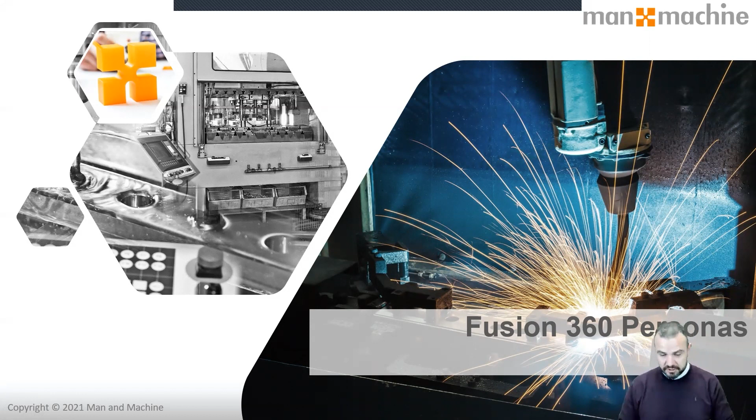This webinar, we're going to be looking at Fusion persona offerings. Many of you already use Fusion and some of the extensions, perhaps the machining extension, simulation, or manage extension. We're going to be looking at a relatively new package offering from Autodesk called the persona offerings, and explore the benefits and reasons why they might be of interest to you.

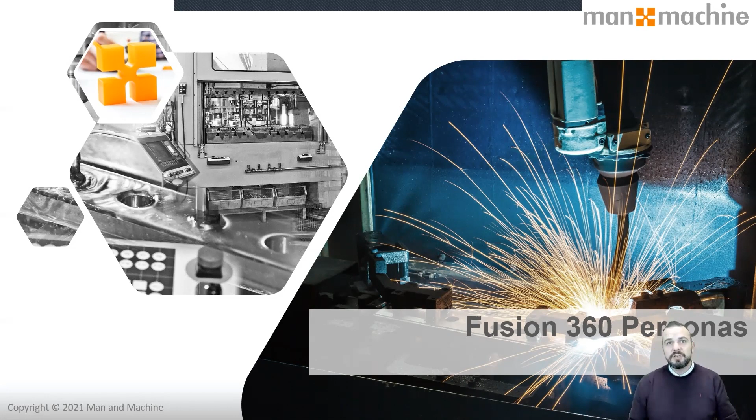For those of you that already know and maybe already use Fusion, you know that Fusion is a platform. The CAD/CAM industry for many years has become relatively confusing and relatively hard for you to justify company investments in specific tools for specific tasks.

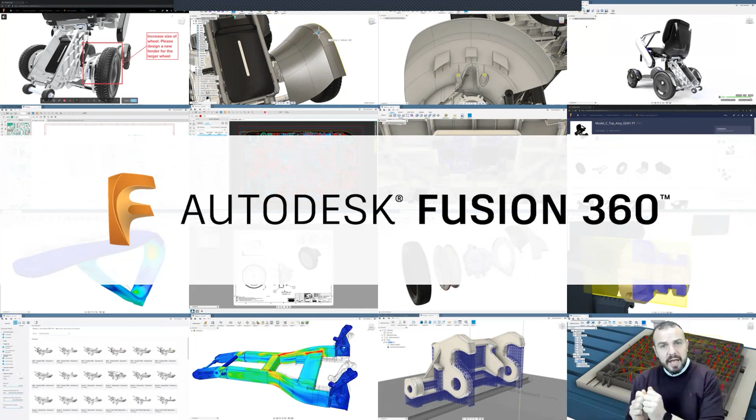Autodesk really want to challenge that into the next generation of tools. Rather than thinking about Fusion as a CAD tool, which of course it is, think of Fusion as a platform, a cloud-based hybrid working environment, giving all your users at various levels access to the right tools at the right time and the right price.

But let me start with base Fusion. For those of you that have investigated or followed the journey of Fusion for many years will know that it has become a very powerful CAD/CAM tool. And it's a little bit more than that.

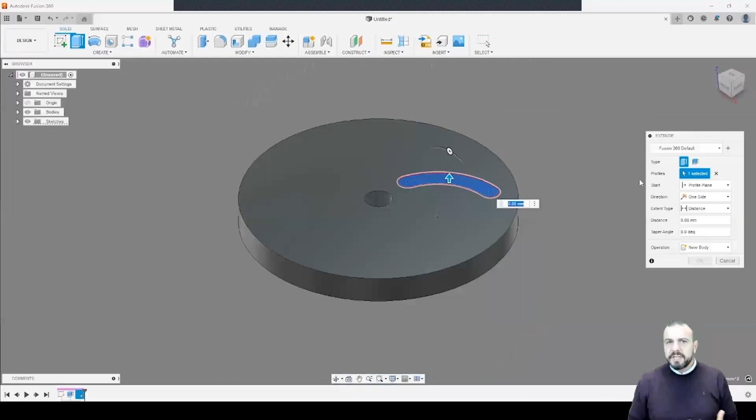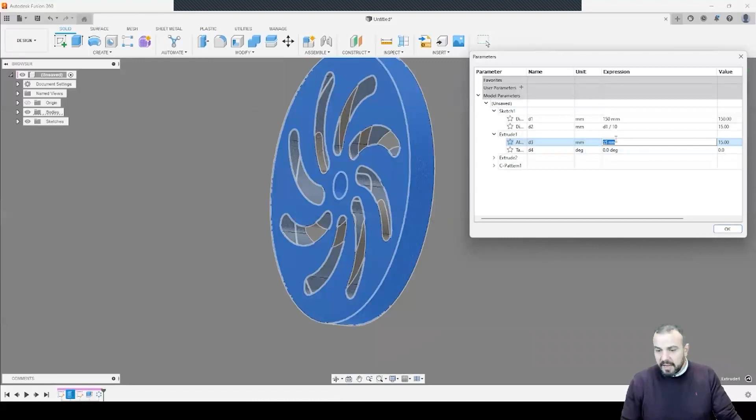Three or four years ago, if you'd have asked me about Fusion, perhaps I would have said that it's a tool really quite nice to use for hobbyists or home users. But in recent years, it's really become a tool to look at again for businesses. The functionality going into Fusion, the rapid rate of development, is more than I've ever seen within the CAD/CAM industry, and I've been in the industry for 18, 19 years now.

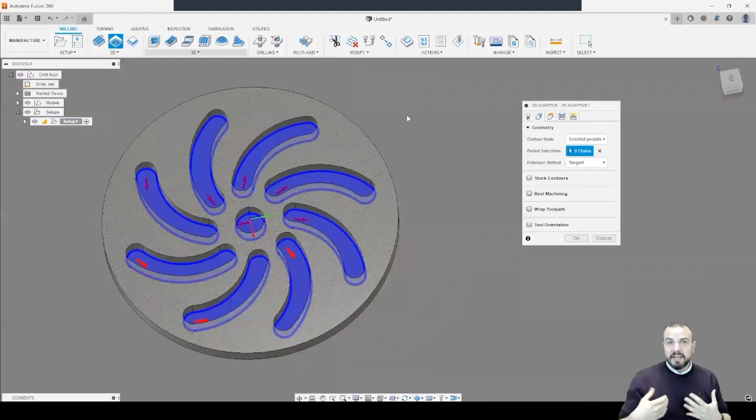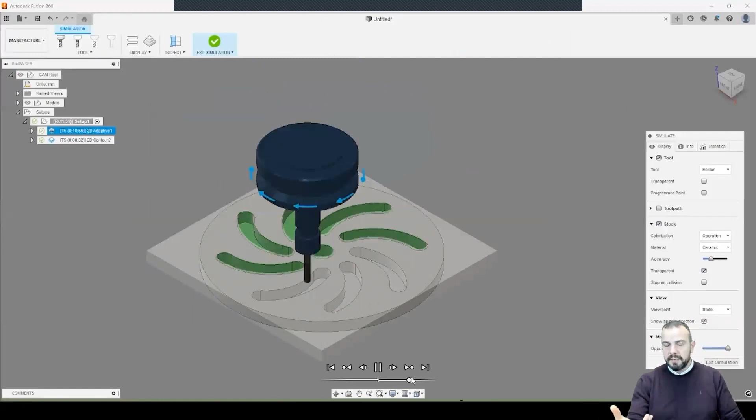But base Fusion, at a very affordable price, gives all fully functional CAD geometry tools, all the tools you would expect - patterning, cutting, machining, being able to do 2.5 and 3 axis machining straight out of the box, in the same platform, same environment, fully functional tools for an affordable subscription price. That's why, when people hear the price of Fusion - around £400 per year per user, don't quote me on that - they almost think, well, it can't be that good.

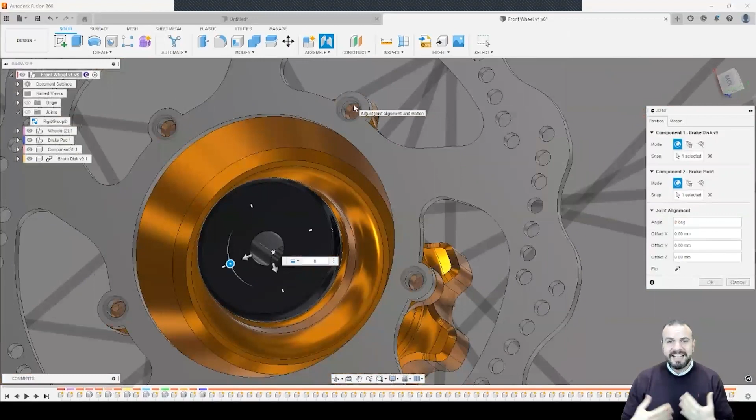It's natural to think that a cheaper product isn't as good as a more expensive product. Well, you'd be wrong. I'd encourage you to go and try Fusion, because the people we talk to about Fusion, they like using it. They enjoy using it.

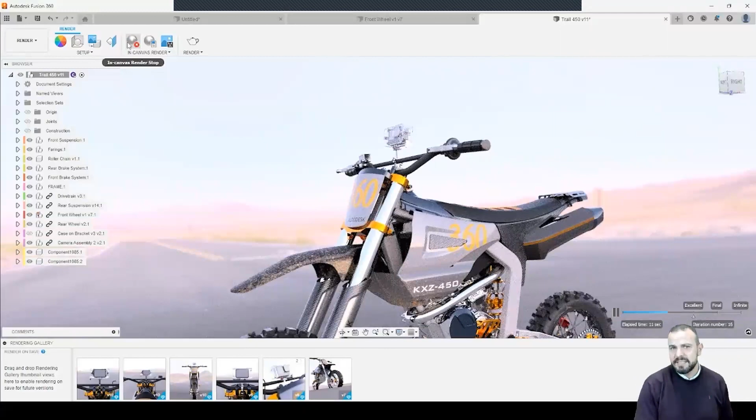It's almost putting the fun back into CAD tools. Gone are the days of menu after menu after menu, and actually having an intuitive environment that understands what you're clicking on, understands what you want. It gives you the right parameters based upon the geometry you're in, as well as the functional CAD, CAM, simulation and rendering tools.

Autodesk over the years have acquired many bits of technology, some awesome bits of software for specific tasks. But the way it's always been done from a cost perspective is that you, as a user, would need to almost justify the cost to go and buy that bit of tool to do that function. Often, if it's something you're doing once in a blue moon, it's a difficult sell to your boss, difficult to justify the cost.

Well, you don't need to anymore. It's in the box, you have Fusion. It gives you rendering, very functional rendering, and Autodesk is very strong in the rendering environment.

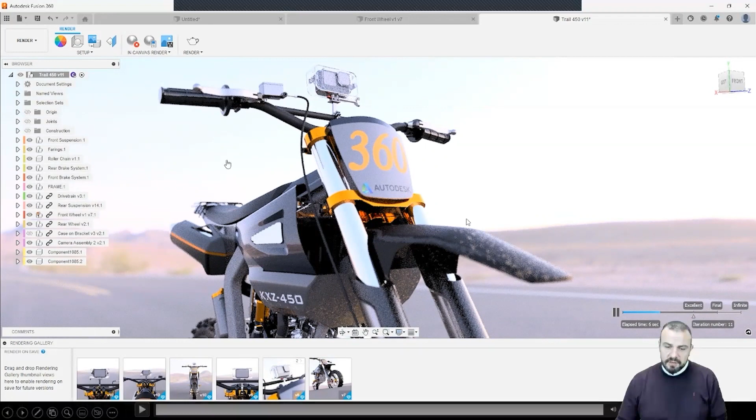Encourage you to go and have a look again at Fusion if you haven't already.

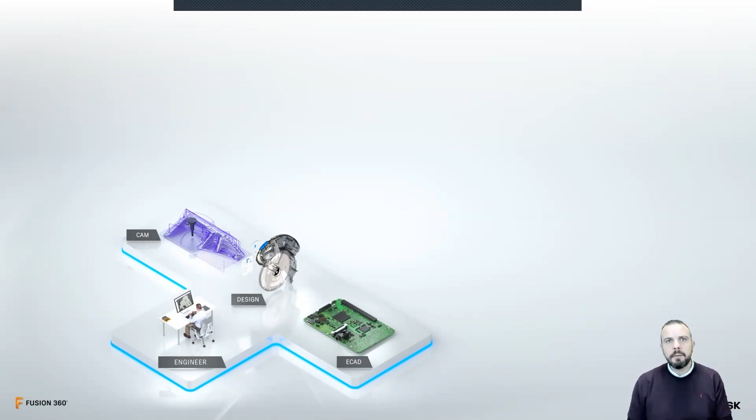To put it in context, let's look at how Fusion is changing the environment. If you think about a traditional manufacturing business, you may have an engineering department that needs to access CAD and design tools, with elements of CAM, design and electrical design - that could be the same people or different people. Historically, in larger automotive or aerospace industries, these might be separate departments, but now it's often one guy or one department that has to do a bit of this and a bit of that on a day-to-day basis.

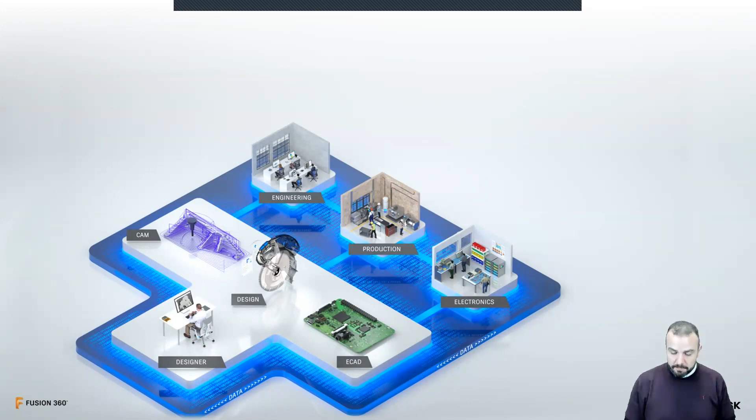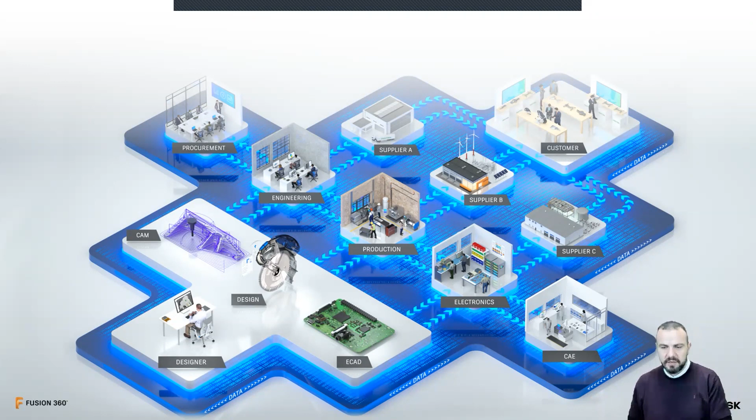As well as that, you often need to manage that data between the designer, the electrical engineer, the CAM engineer - manage revision control across different departments. And then you've got external departments, whether that's bits you buy in, the CAE department, supply chain, bringing in data from external suppliers, or feeding into the customer environment.

What that actually looks like in reality is a mix and match of different software, whether different CAD tools, electrical tools, or analysis tools. And of course, the old blinkered approach to CAD - my software is the best and I can only work with other suppliers that use exactly the same tool as me - was historically quite a sales approach. You sell to one company, and then their entire supply chain has to use your tool as well. Well, those days are kind of gone now.

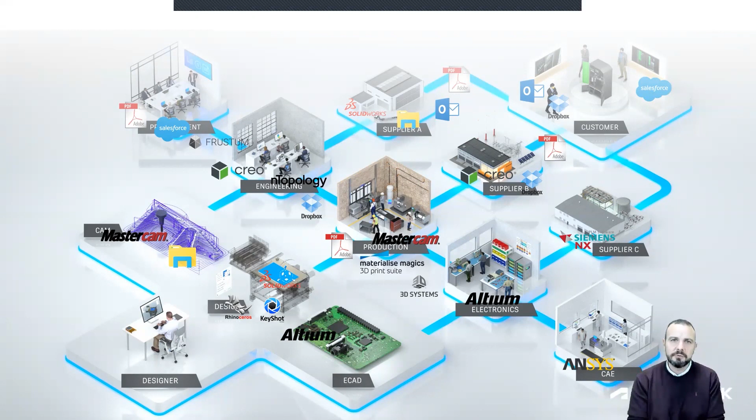One thing that Fusion has added in recent years is a function called AnyCAD. AnyCAD is the ability to not only read in files from SolidWorks, CATIA or Creo, and then manipulate and use them on top, but also, if you're making tools from a file from an external supplier that comes in a CAD-neutral form like STEP or IGES - which is dumb geometry - that may change, and you may get version 2 of that file.

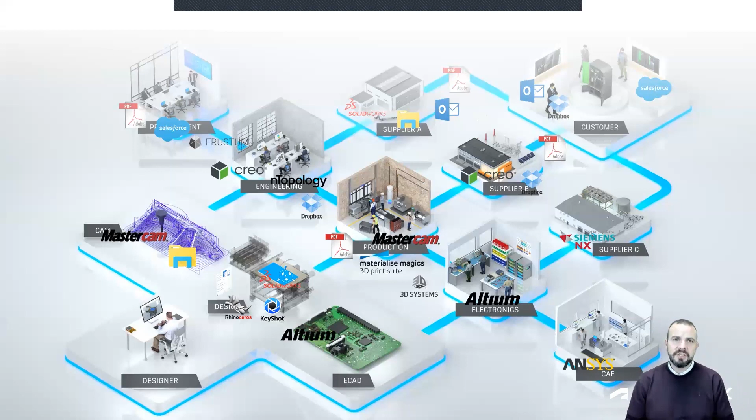Why would you have to rework all your data? If you're pointing at that file, AnyCAD gives you the ability to just re-update the file you're pointing at, and everything you've done is updated on top. So the world has changed, and not only the environment but also the way that we access the technology. We have a robust cloud-based infrastructure now - why not use it? Why not make use of the infrastructure that's there? The world has definitely evolved.

The way that Fusion is packaged is really interesting, and it flips the whole justification-to-your-boss scenario on its head. Traditionally you may have CAD, CAM, PCB, simulation, visualization all as separate entities. Historically, you may do CAD every single day, CAM every single day, but you may only do simulation once in a blue moon, or visualization twice a year.

These have become difficult justifications, especially with something like simulation - I can remember simulation tools costing 20 or 30, if not more, thousand pounds. To say to your boss 'I need to spend this much money to do one job' is a real difficult sell, so it often doesn't get done.

What Fusion does is give you all of that, plus a lot more, as well as data management, all within one simple package. It's a platform - I don't want you to think of Fusion as simply a CAD tool or a CAM tool, it is a platform for the future. It offers all of this in one functionality, all for - don't quote me on the price - around £400 per year per user, something like that.

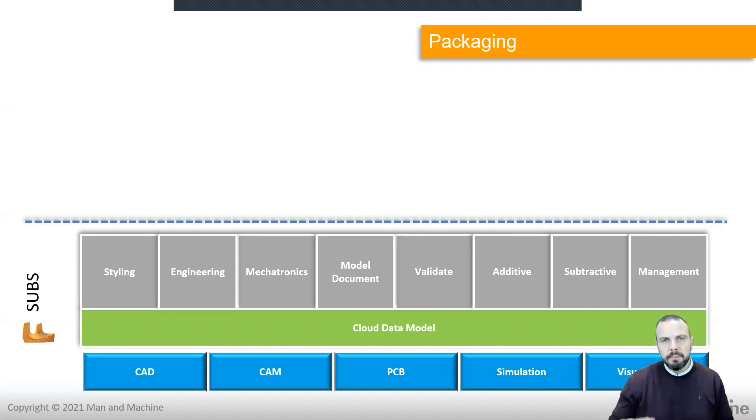But on top of that, and one of the reasons why I think you're here today, is because some people want to go a little bit further - they want the advanced functionality, whether that's in the machining environment taking it into 5-axis, whether that's in additive builds taking it into metal 3D printing, or simulation taking it into the world of non-linear simulation.

These are functions that not everyone needs to do, so Autodesk have got extensions, they're called. You can access these extensions within your base Fusion package on a consumption basis, a pay-as-you-go model, where as an organization you buy a set of tokens. You buy a bundle of 500 tokens, and every time you use a simulation, or do a thermal study within Simulation Suite, or an element of product design, you cash in some of those tokens to use as you do.

If it's something you're doing regularly, all day every day, you can subscribe to these extensions on an annual basis, giving you full, unlimited access to all the functionality within those advanced functions. More regularly, what we're seeing is organizations might have 10 users of the base Fusion package, but then one machining, one simulation, and one product design user. That's traditionally how it's been working at the moment.

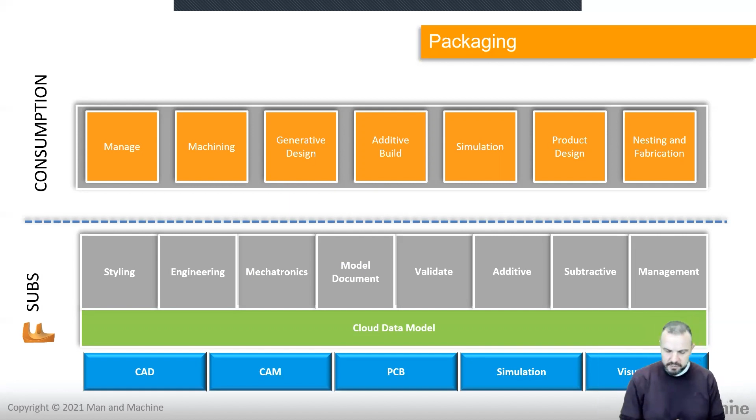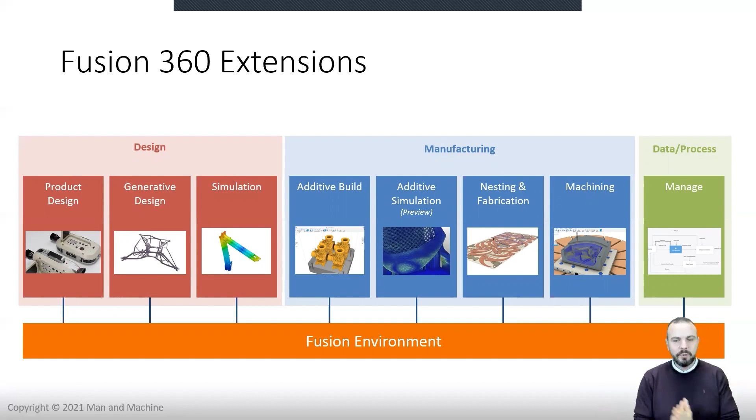One of the reasons you're here today is because Autodesk have recently released what they're calling the persona offerings. If we look at the different extensions they have at the moment, they're grouped into two areas really: there's the design functions, product design and simulation, and then there's the more manufacturing type extensions - additive build, nesting and fabrication, and machining. Autodesk realized that sometimes users, either in the design world or manufacturing world, want access to multiple extensions, so they've grouped these extensions into what they're calling their persona offerings.

There are two persona offerings. There's the Fusion 360 for Product Design persona, which incorporates not only the product design extension, the simulation extension, and the manage extension all in one box, representing about a 40% saving on buying them individually. And then the Fusion 360 for Manufacturing persona incorporates machining, nesting, additive build, product design - because there are some useful functions for anyone doing plastic product design in a manufacturing space - as well as the manage extension. That one represents a saving of over 50%.

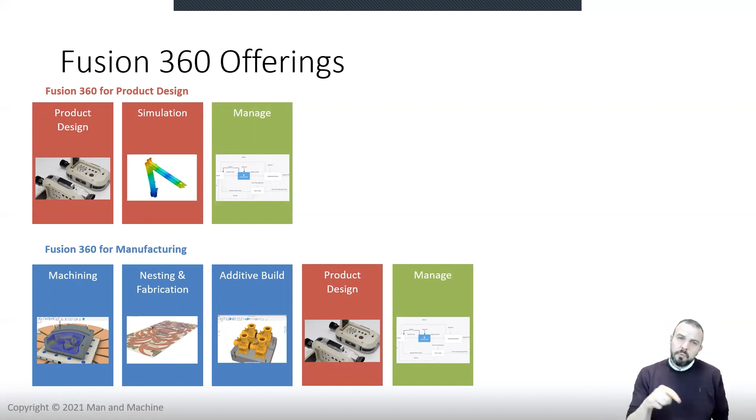So a really interesting packaged offering for individual users that maybe want access to Fusion's more advanced features. What I wanted to do today was take a more in-depth look at the different extensions and what they offer. I've asked our engineer Cameron to give us an overview, with some videos now about what each extension offers. We've done webinars in the past on our YouTube channel that take a more in-depth look at a user level at all of these extensions, but what I wanted to do was just show you what the product design extension offers.

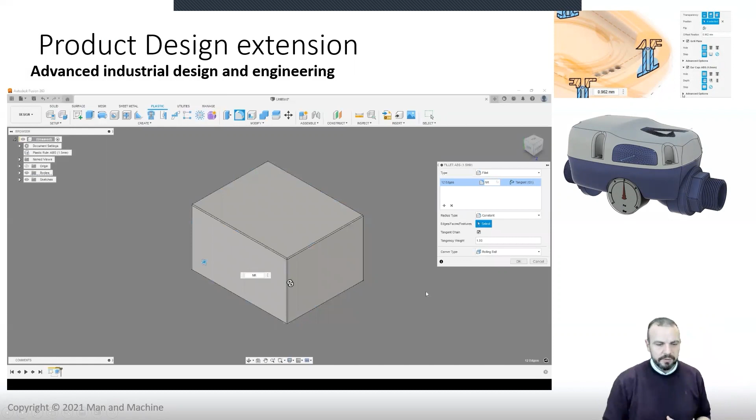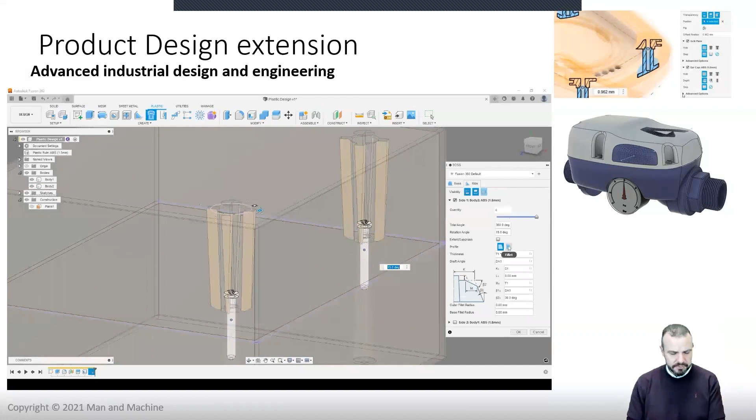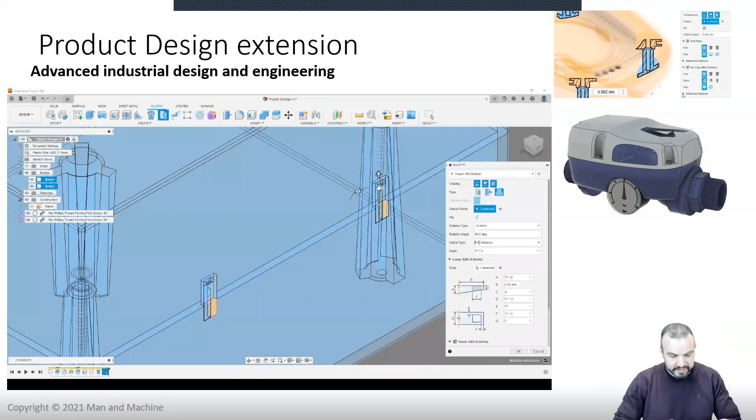The product design extension allows you to easily create really complex geometry - advanced aesthetics if you're doing plastic injection molding tools, things like automatically creating bosses, having the ability to manipulate those bosses. Those advanced features - not only the screws, but the wings and everything around that boss - are automatically generated, all within an easy to use area, as well as clips. Being able to not only create and manipulate the clip or holding fastener, but take away the positive and negative of that clip all in one hit.

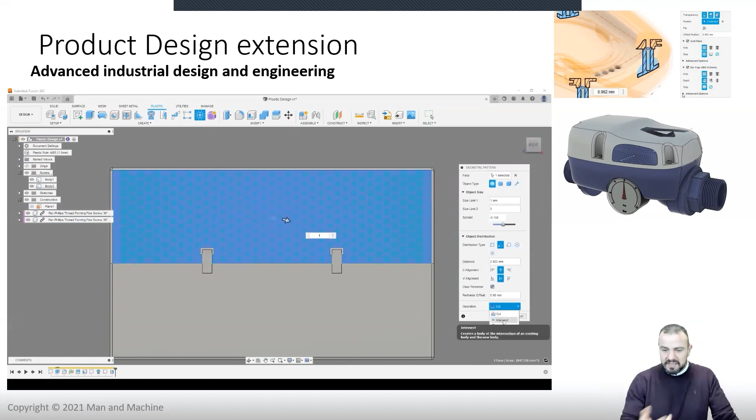My favorite additional function within the product design extension is the geometric patterning. This is the sort of thing that perhaps would take a designer half a day to create. The ability to automatically create advanced features and control how they look and feel, all within highly customizable options, whether that's user defined or predefined, all in the same package - really functional if you're doing anything to do with plastics. Please look at the product design extension; we've done a webinar on it previously where we look at a little bit more detail.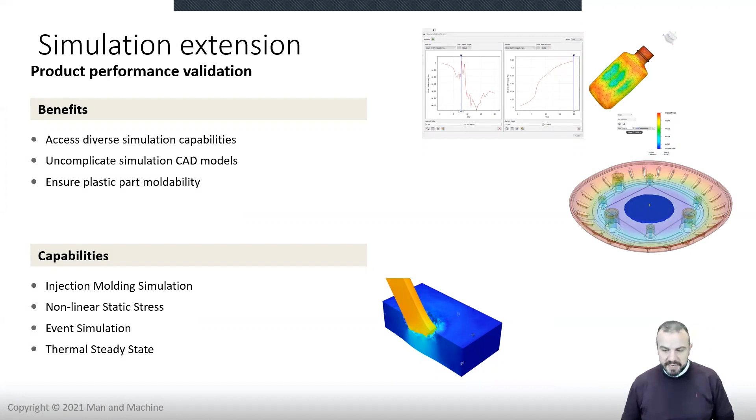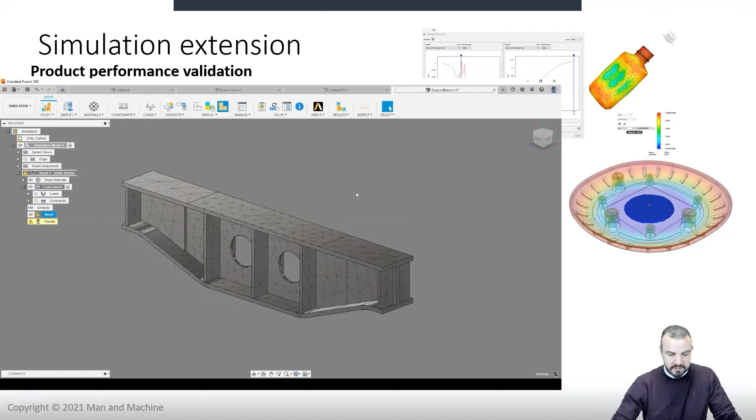Also in the persona offering for designers is the simulation extension. The simulation extension takes the base Fusion geometry and simulation, and gives you unlimited access to all the highly functional simulation things you would want to do. Things like injection molding analysis for plastics engineers, all within the simulation extension. Non-linear static stress is in the simulation extension, unlimited - you can use it as much as you want - as well as event simulation, so impact testing. Is your product going to withstand being dropped on the floor? That sort of drop test.

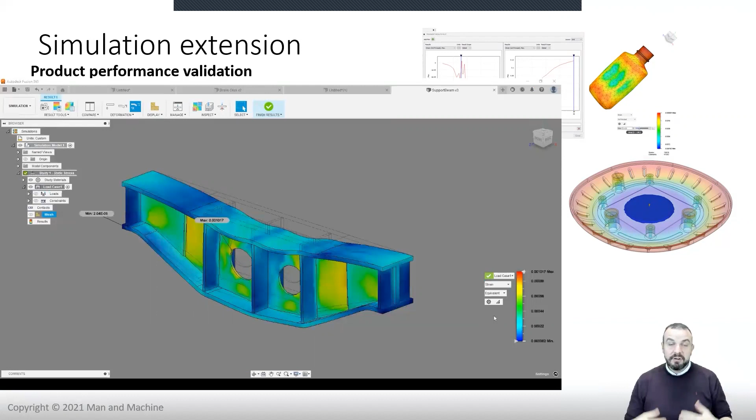Steady state and thermal, modal frequencies, structural buckling, thermal stress, as well as shape optimization are all included within the simulation extension. These are advanced simulation studies that perhaps you need to do once a project, once a month, whatever it is. But with the simulation extension, you can do it as much or as little as you want, and these are advanced functions that, not that long ago, we were selling simulation tools for 20, 25, 30,000 pounds a license, which is a difficult sell if you're only using it once in a blue moon.

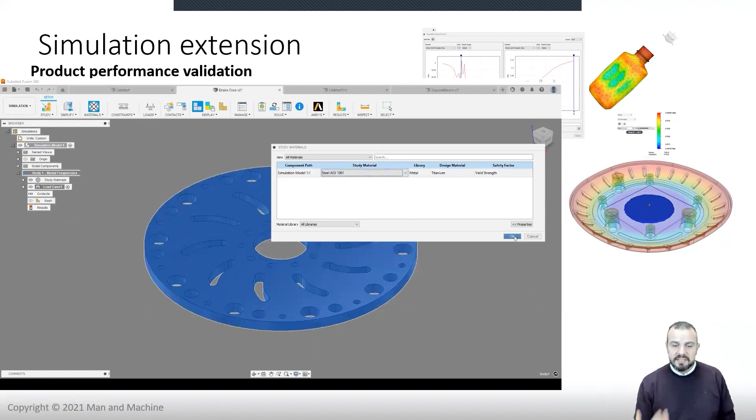But being able to accurately calculate, and these are trusted based upon Nastran - Autodesk acquired Nastran a few years ago now, and if you're already a user of the product design extension, it's the same technology embedded within Fusion in the simulation extension. Being able to do all of this within the same environment that you're already used to in the CAD is a real benefit if you're already using Fusion.

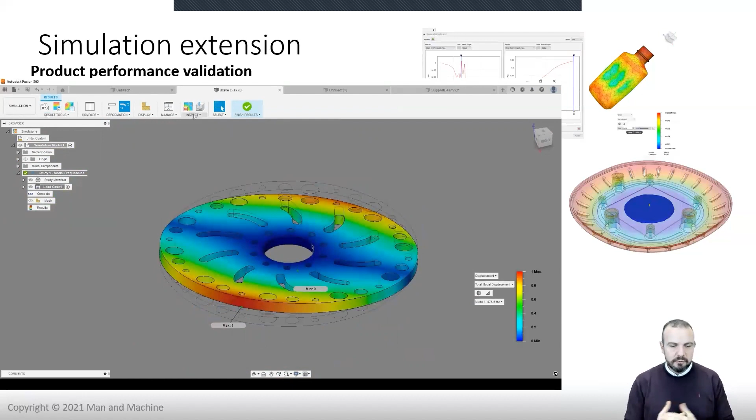As well as that, what often people want to be able to do is manage their data. So not only are you creating more data, you're creating simulation data, electronics data, but you need to be able to effectively manage that data in the cloud without worrying about your server specification and your SQL environment. The manage extension allows you to do things like change orders, automatic part numbering, all within the environment in the cloud inside of Fusion.

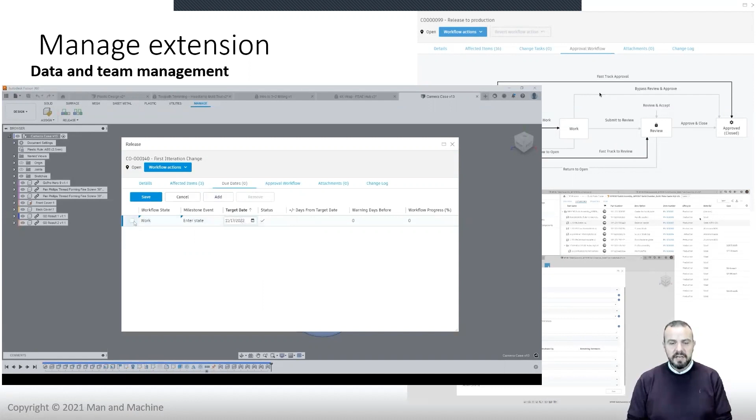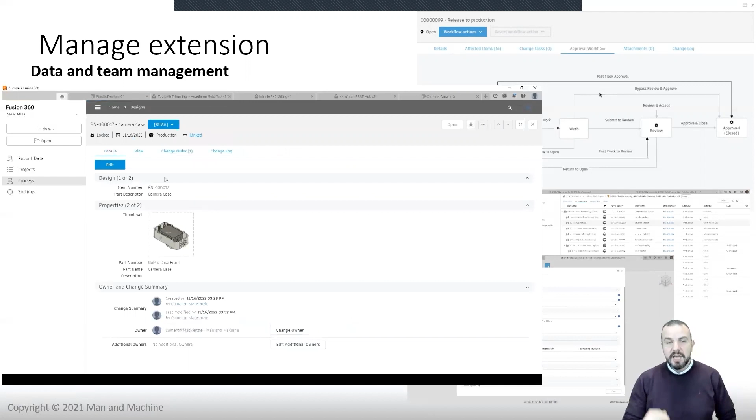Version control, bill of material management, and life cycles are all included. If you're a business managing your data, you need to control essentially who has access to what data and when - whether you're a designer in the early stage of a design or on the shop floor, you need only have access to the latest released version, or in procurement, only access to the right data you need to acquire. The manage extension allows you to have notifications and push notifications to the right people so that they have access to the right data at the right time.

And that is key to anyone involved in product design - being able to control access and make sure that the right people, whether internal or external, have access.

One of the things companies often struggle with is being able to take that data and seek approval, perhaps from the customer. If you're using something like Vault or another PDM system, what often happens in reality is a PDF is created and sent to the customer for approval, which makes it completely non-controlled. Using the manage extension allows you to give cloud-based access to anyone in the world with that link to approve it externally. That is a huge leap forward for anyone involved in design and customer sign-off.

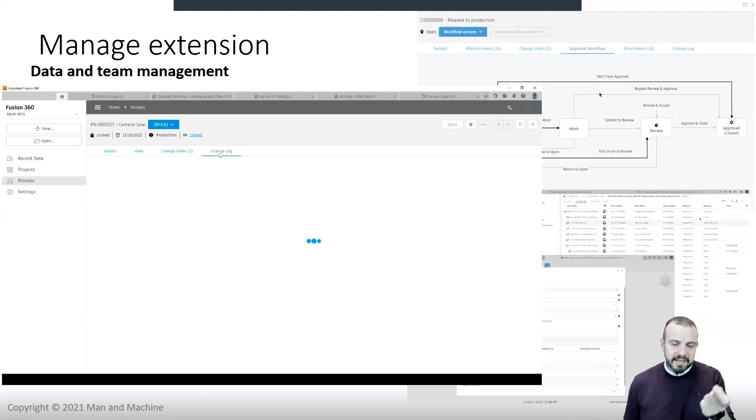So those extensions are all included within the design persona offering. If you're already using Fusion, get in touch if you're interested in either the extensions or the persona offerings, because I think they really offer some value and some advanced functionality.

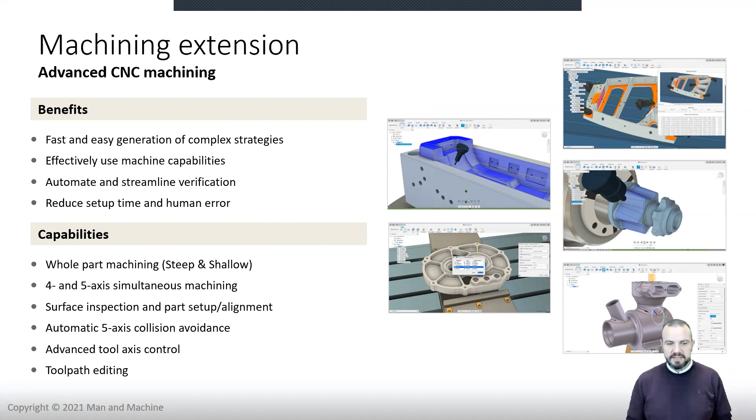Now the manufacturing extension takes it a little bit further. One of the ones I'm really personally very excited about within the Fusion extensions is the machining extension. We have done a webinar on this looking at it in a bit more detail, but the machining extension is highly functional - what it basically does is take it to advanced machining strategies, for anyone involved in 4 and 5 axis simultaneous environments, really taking it to the next level.

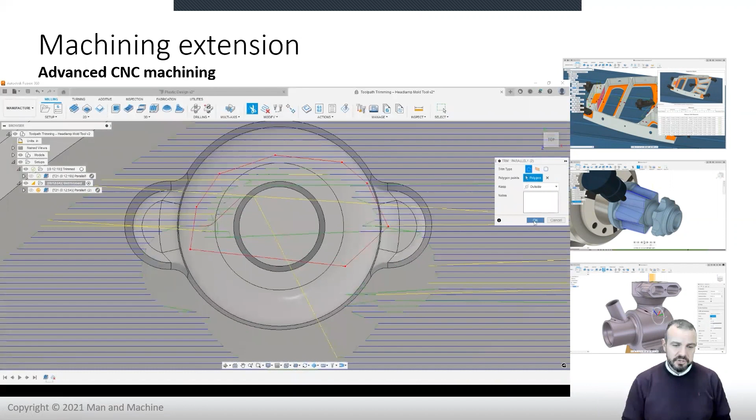Automatically recognizing holes, automatically selecting the right tool for the job and ordering them so that your cycle times are a lot quicker is central to what the machining extension offers. It also does tool path optimization, things like making fast edits - so if something doesn't look quite right, rather than deleting it and starting again, you can manipulate the toolpath as you see it on the screen without regenerating the whole thing.

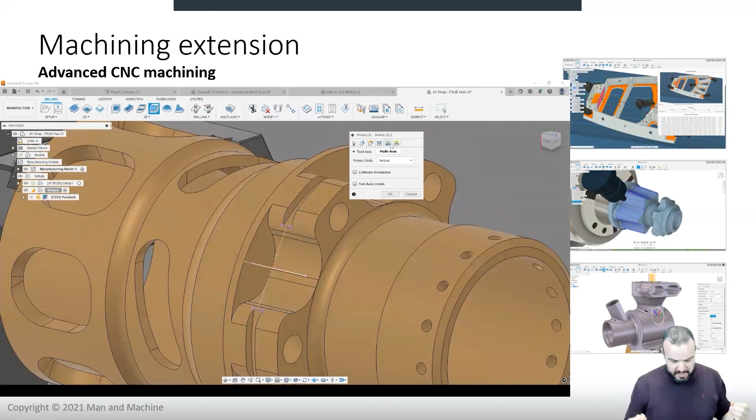As well as that, the machining extension offers on-machine verification. So if you have any spindle-mounted probes, being able to work with them in a more efficient way I think is key to the machining extension - fully functional, really advanced functionality, all included in the manufacturing persona.

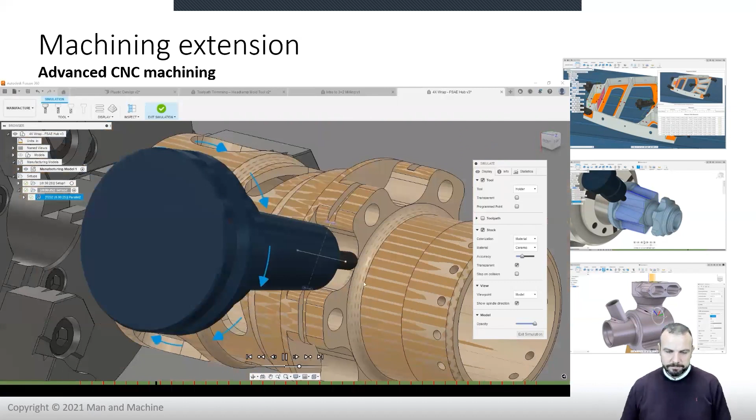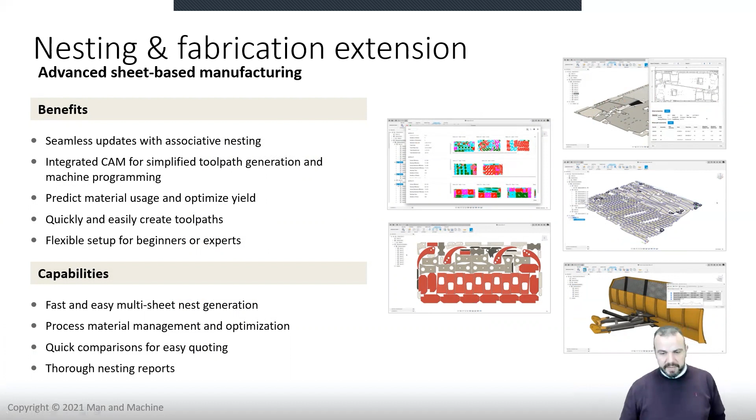Also included in this bundle is the nesting and fabrication extension. This is something that personally I'm really excited about - being able to do anything to do with sheet metal, optimizing, understanding the associative sheet thickness, layout, and laying them out in a more efficient way. I think this is key to the nesting and fabrication extension.

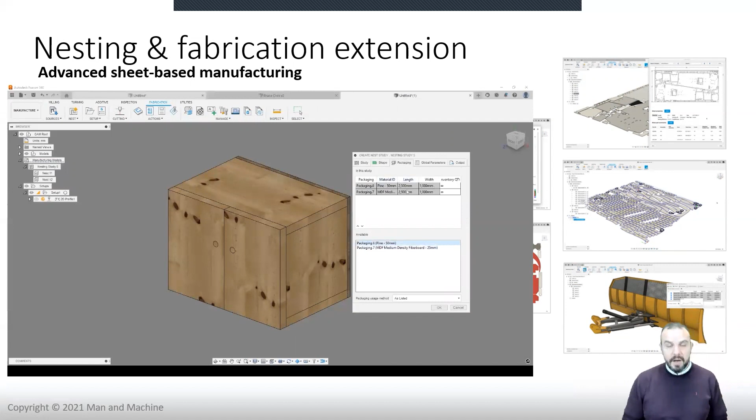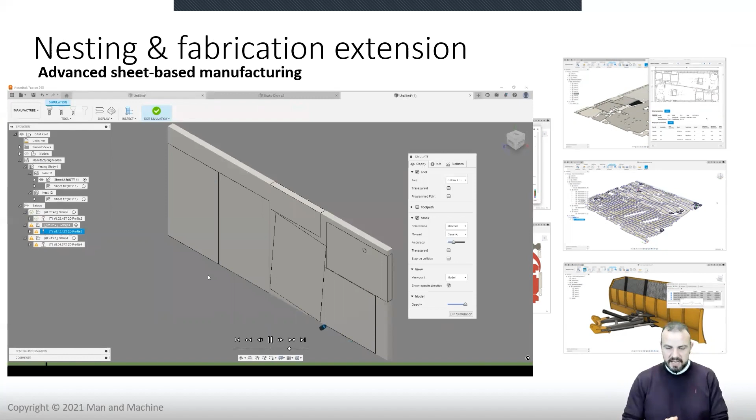Multi-sheet nesting is also included, along with automatic material thickness and part quantity, so you can optimize your stock usage. The other thing that nesting and fabrication does is allow you to compare previous jobs - usage and cost, material and stock size - so that when coming to quoting decisions, you can make informed decisions about quoting the right amount based on the stock and previous jobs you've done. All included within the nesting and fabrication extension or within the manufacturing persona offering.

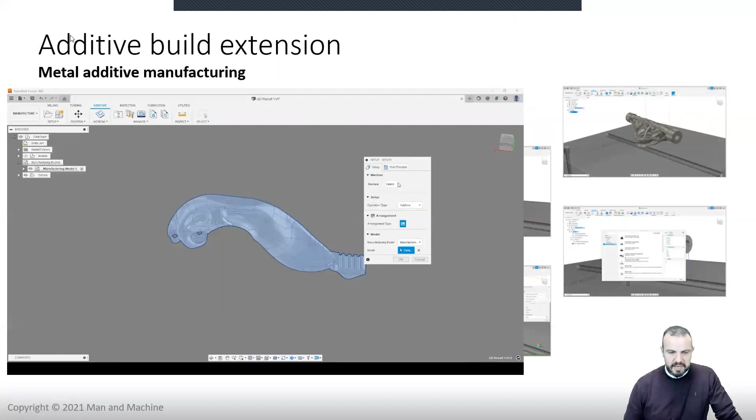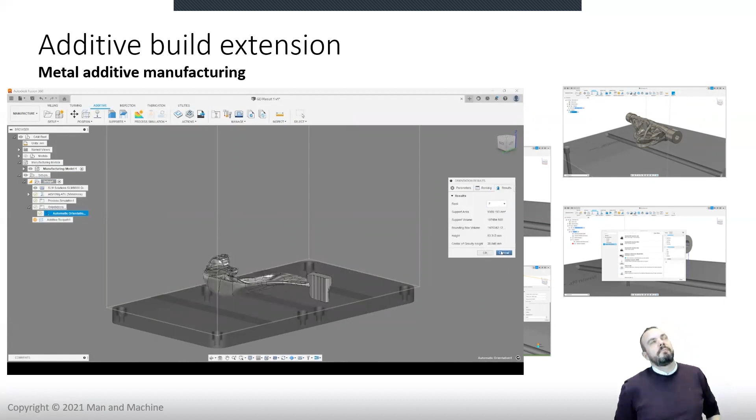If you're involved in anything to do with 3D printing, Fusion offers 3D printing as standard. But if you're getting into metal 3D printing, anything to do with powder bed additive manufacturing, the additive build extension is a must. It really takes metal 3D printing to the next level. Autodesk acquired a tool 5 or 6 years ago called Netfabb, which was the leader in this world. Autodesk integrated it inside of the Fusion environment, allowing users to take the same interface but use the advanced technologies included within Netfabb in the additive build extension.

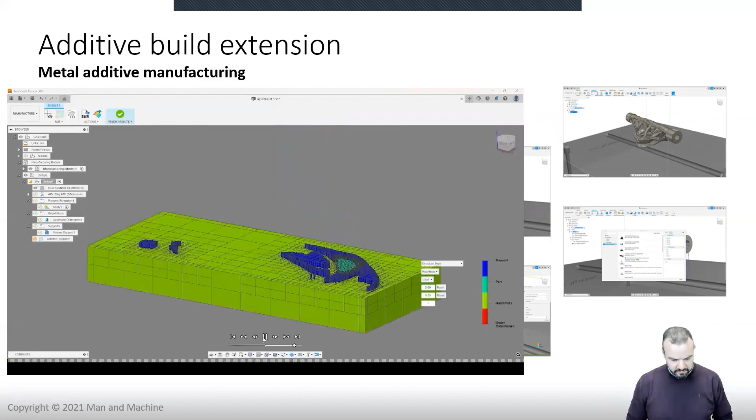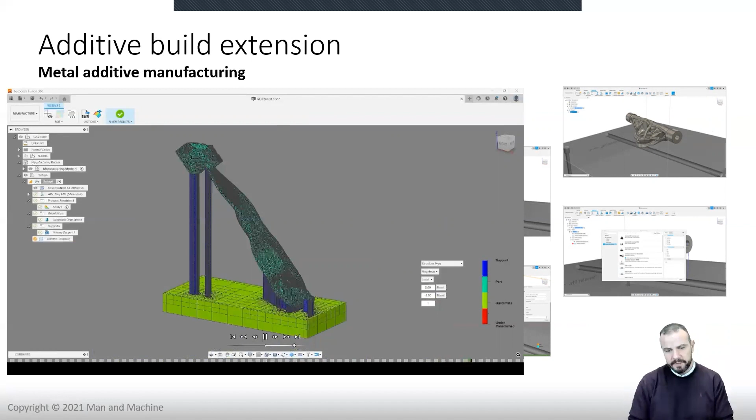So whether you're doing build, shape optimization, layout, 3D orientation to get the most efficient build, warpage - being able to auto predict and eliminate any metal warpage - all included, as well as your support structures and latticing, all built within the additive build extension. Fully associative support structures are built within the additive extension.

The additive extension, if you're involved in anything to do with metal or production-ready additive manufacturing, is a must. The other tools out there on the market are vastly more expensive. The additive extension included within this bundle is incredibly affordable.

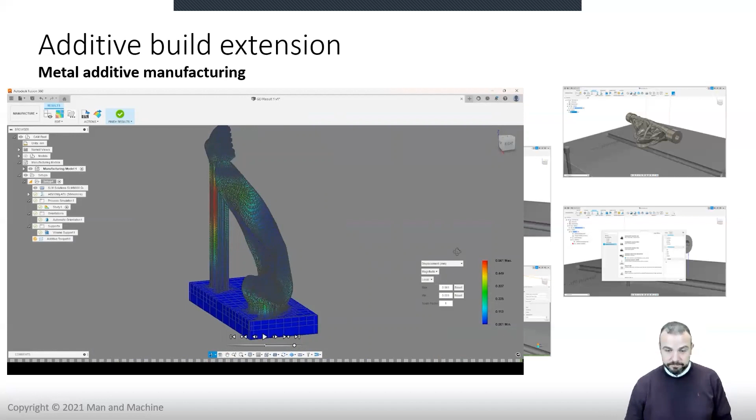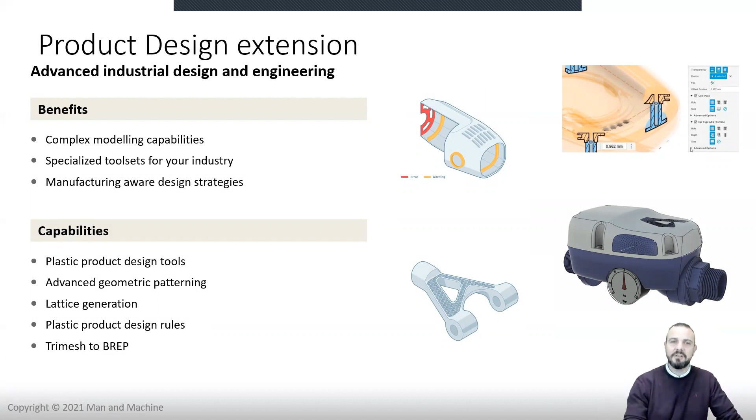I've already shown the product design extension, which is also included in the manufacturing persona offering, giving you the ability to design plastic components - bosses, clips, fasteners, that sort of stuff. Sometimes we find that information goes down to the shop floor and it isn't already there - having the CAD geometry there is key. With the manage extensions, manufacturers also need access to the right data at the right time, and being able to be part of that workflow is included within the manufacturing persona offering.

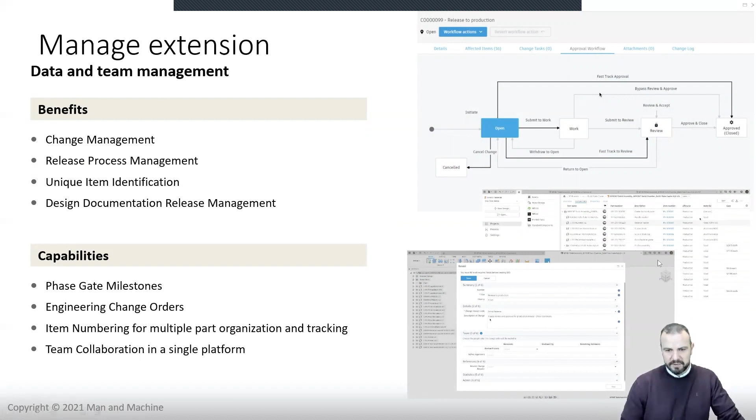So that's that. We, as Man and Machine, obviously sell the software and help our customers with training and support. Our engineering team is one of the best in the country, not only for supporting our clients but also implementing and making the transition from whatever you're using at the moment over to Fusion. People seem to love using Fusion and enjoy the experience of it, and the advanced functionality within these persona offerings and individual extensions gives you access to a lot further.